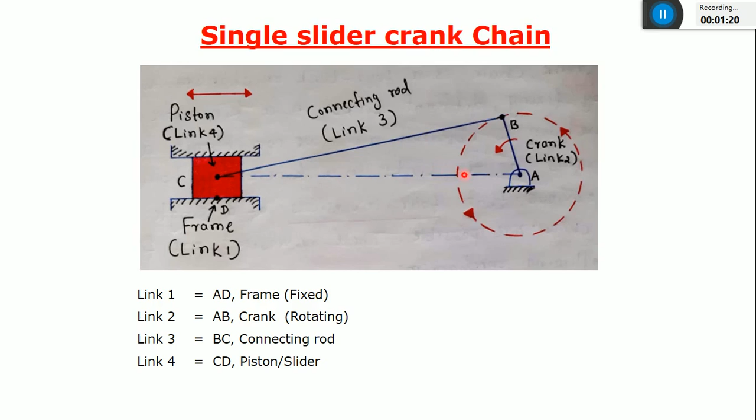After that, we listed 7 inversions, 7 modifications of this single slider crank chain. Out of these 7, the third and the fourth are the most important from the exam point of view: the crank and slotted lever mechanism, and the Whitworth quick return motion mechanism. In the crank and slotted lever mechanism, the connecting rod will be fixed, and in the Whitworth quick return motion mechanism, the crank will be fixed. Here connecting rod is fixed, here the crank is fixed, that is the modification in the single slider crank chain.

Both are examples of quick return motion mechanisms, which are used in a shaper machine, or shaping machine. Just wait for a second.

So this is the shaper machine, and you can see this mechanism is known as the crank and slotted lever mechanism, which was discussed in the previous class, and we have seen the animation also. This crank and slotted lever mechanism has 6 links, 4 basic links, and the remaining 2 are used to connect with the shaper machine. This was the animation. You can see it is having one circular path, circular motion, and one is oscillating type.

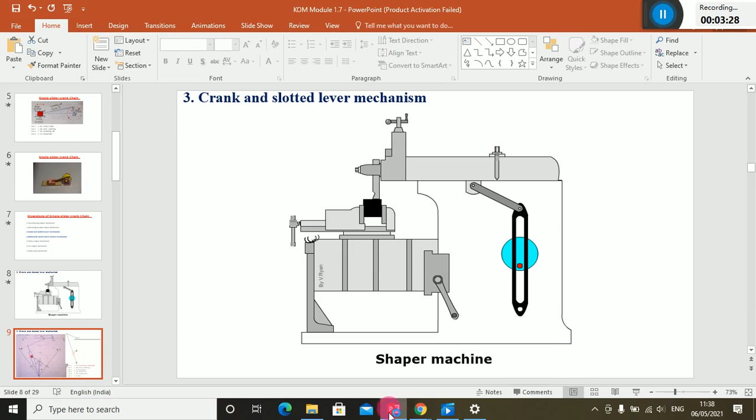So this was the example of a quick return motion mechanism, because during the forward motion it will move with very slow velocity, since it has to remove material from the workpiece. During the backward motion, or the return stroke, it will come back very fast. Hence it is also called a quick return motion mechanism. We discussed the different links, 1, 2, 3, 4, 5, 6, and you can see the connecting rod is fixed in this crank and slotted lever mechanism. So this is the connecting rod.

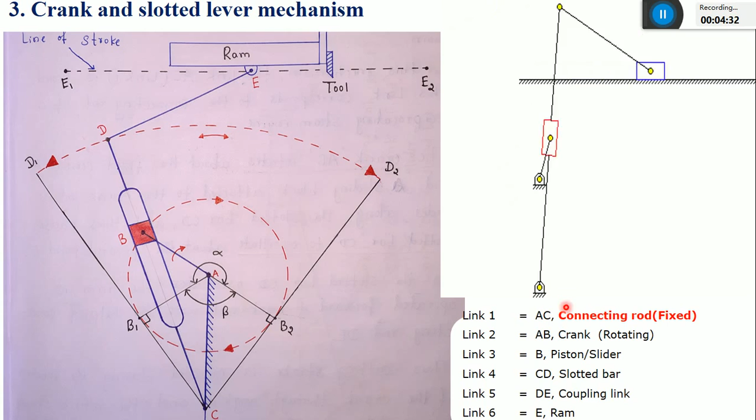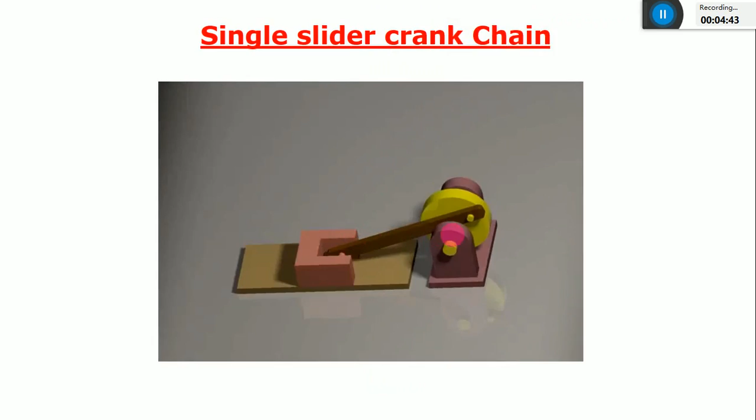As you give input to this crank, the crank starts rotating, hence the slider also starts rotating, as well as reciprocating in the slotted bar, so that you get oscillatory motion of this slotted bar. The longest link of all 6, that is the slotted bar, is oscillating from left to right and right to left, so you get the output motion as forward and reverse, which is the application of a shaper machine. You can see it is forward and reverse, that's the ultimate output we need from this mechanism.

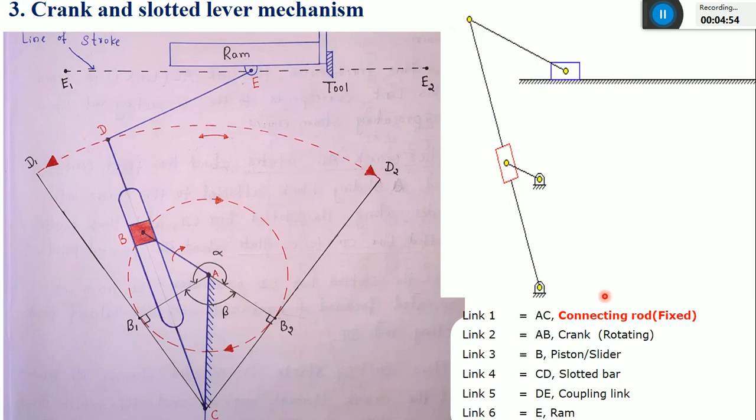So this was the animation of this crank and slotted lever mechanism. After that, we also discussed the second quick return motion mechanism, that is Whitworth. The working principle is again the same. This mechanism is again connected to the shaper machine, which is nothing but a ram and cutting tool, because I want a forward stroke, called the cutting stroke, and the reverse stroke, called the return stroke.

Only the change is that in this case, instead of the connecting rod, the crank will be fixed. Instead of connecting rod, the crank will be fixed — that is the keyword of this mechanism. You'll get two rotary paths, one with respect to point D, that is the slotted bar, and one more is the slider.

During the forward stroke, the angle made by this slider, from B1 to B2, will be alpha, and during the return stroke, the angle will be beta. Since angle alpha is greater than beta, it means during the forward stroke it is taking more time — moving very slowly during the cutting stroke — and beta is less, so the time is also less, meaning it returns back to its original position very quickly within less time.

So this was the application of the crank and slotted lever mechanism as well as the Whitworth quick return motion mechanism. This was the animation — you can see the slotted bar is also rotating, the slider is also rotating.

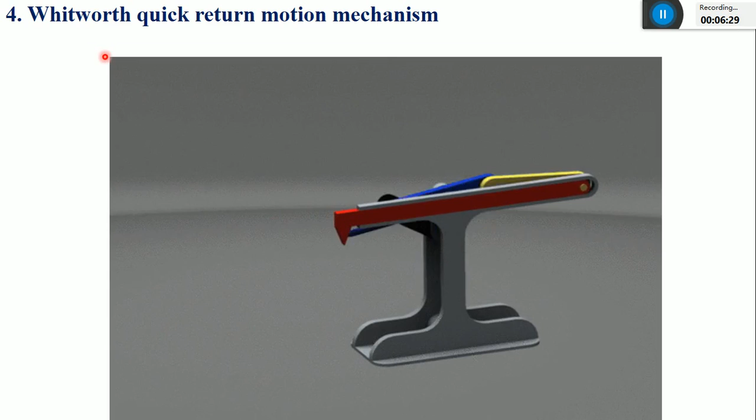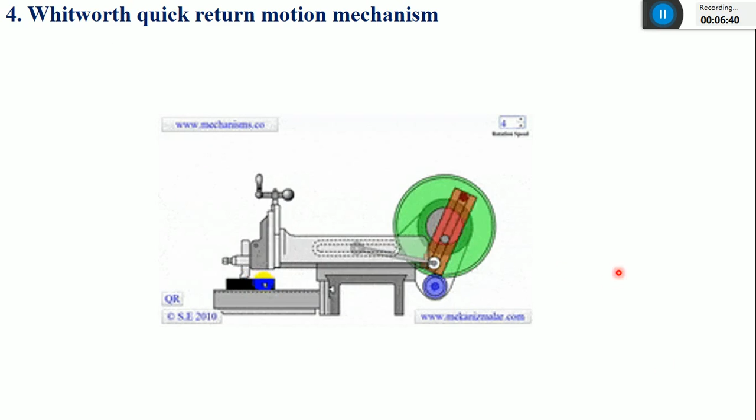So this was also an animation of a Whitworth quick return motion mechanism. You can see the application of this mechanism for the shaper machine. So these two mechanisms were discussed in the previous class. Correct.

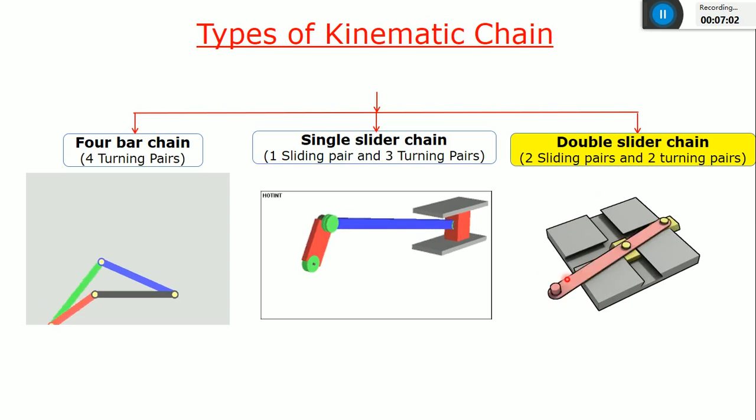In today's class, let me start with the last one, that is a double slider chain. This double slider is having two sliding pairs of both the pistons or both the sliders, and two turning pairs. It is also having four kinematic links, and this double slider chain has three modifications, called inversions, or types of double slider crank chain. First is elliptical trammel, second is Scotch yoke mechanism, then third is Oldham's coupling. We have discussed elliptical trammel in the previous class.

This elliptical trammel is also having four links. Link one is nothing but a slider, can consider any one. This slider is one link, this also one more link, and the link that connects both the sliders is one more link, that is AB, and I'll extend this AB up to point P. This plus mark you can see is a frame, this is a fixed frame.

Similar to a railway track, it is having a vertical groove and a horizontal groove. In those grooves, the sliders are going to slide. In the vertical groove, the slider A will slide up and down, and in the horizontal groove, the slider B will slide from left to right. So finally, when you fix any pencil or point at this point P, it will trace an ellipse.

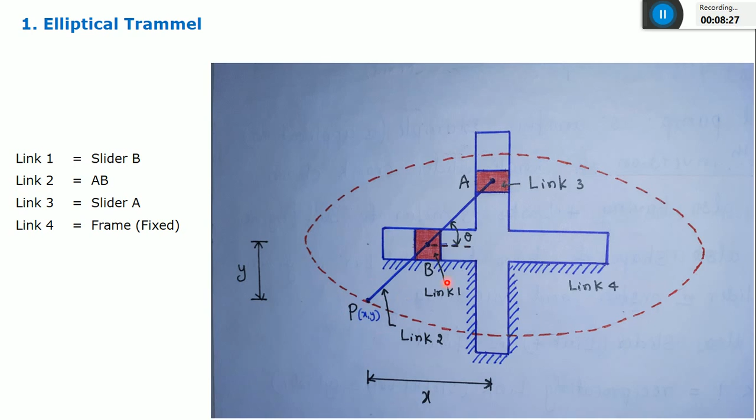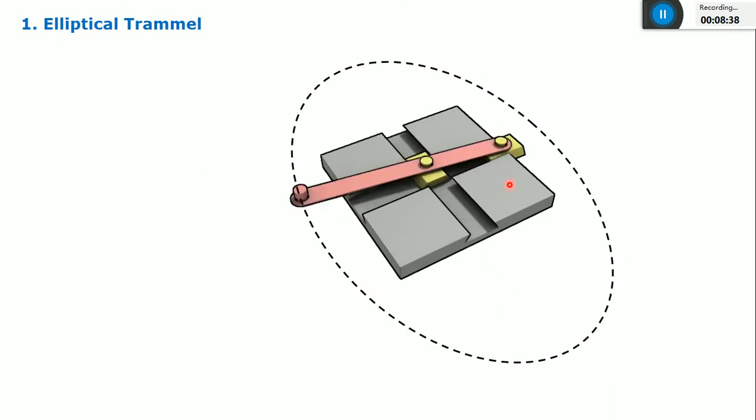The coordinates of this point P are X and Y. So the center, you can take as the origin, and this is X and this is Y. This was the animation. Now also we have proved by using the equation, some derivation, that the path traced by this point P is an ellipse.

Just wait for a second. Just wait for a second. Yeah,

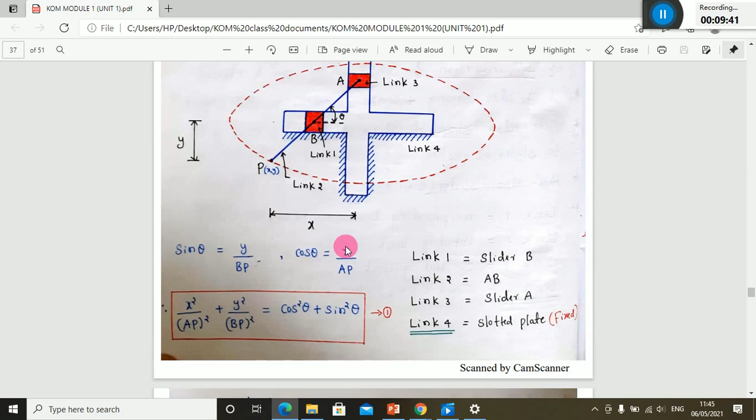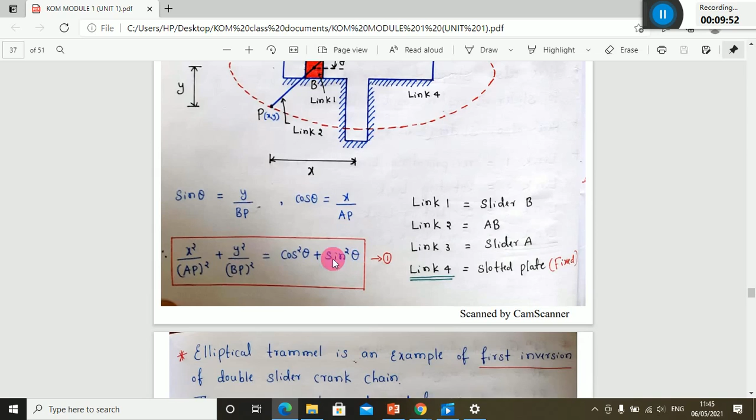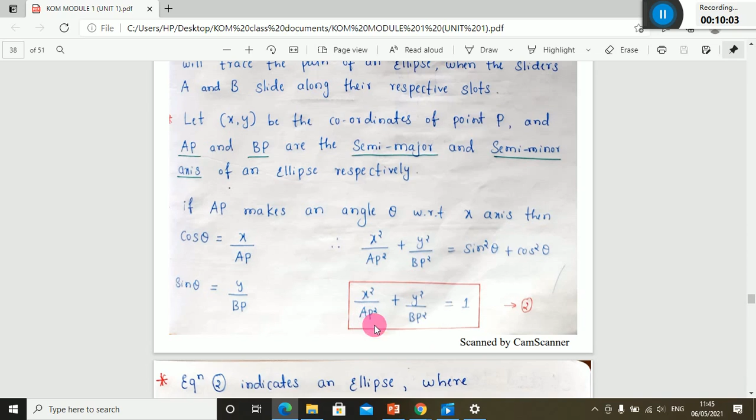This one. When you consider this AP as a reference, and when you're going to consider this triangle, when you apply cos theta, you'll get X by AP, and when you consider this small triangle with respect to link BP, you'll get sin theta, that is Y by BP. So after substituting and simplification, the equation you get is nothing but an ellipse: X square by AP square plus Y square by BP square is equal to 1, where AP is a semi-major axis and BP is a semi-minor axis. This was discussed in the previous class.

In today's class, take the heading as the second inversion, that is a Scotch yoke mechanism. Please write down this Scotch yoke mechanism. This is the second inversion of double slider crank chain.

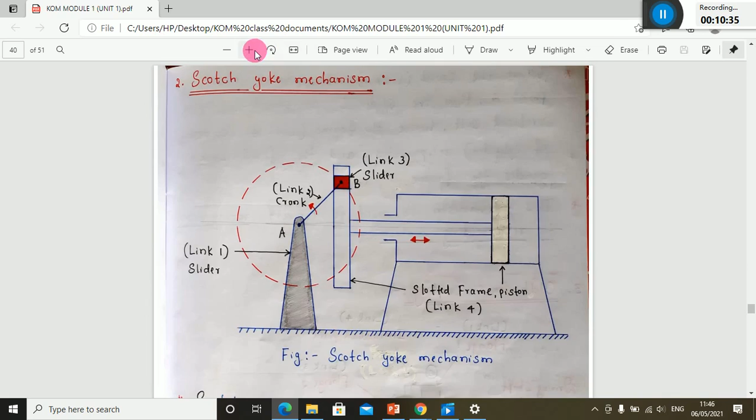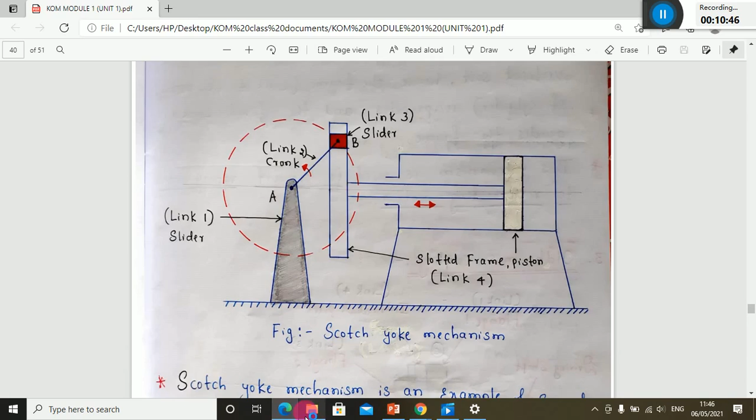Better I'll show the animation first, then only it will be easy to explain this mechanism. So first let me show an animation, the double slider crank mechanism. Before that I'll show the elliptical trammel also, it will be easy to correlate with the first one and the last one. So this is nothing but the elliptical trammel mechanism.

You can see the point P is tracing an ellipse. Whether this video is visible? Anyone please reply. This video is visible or not? Yes, sir. Okay. Yes, sir.

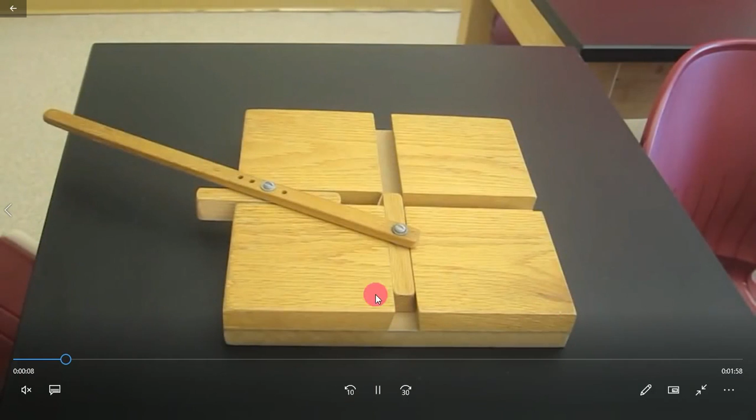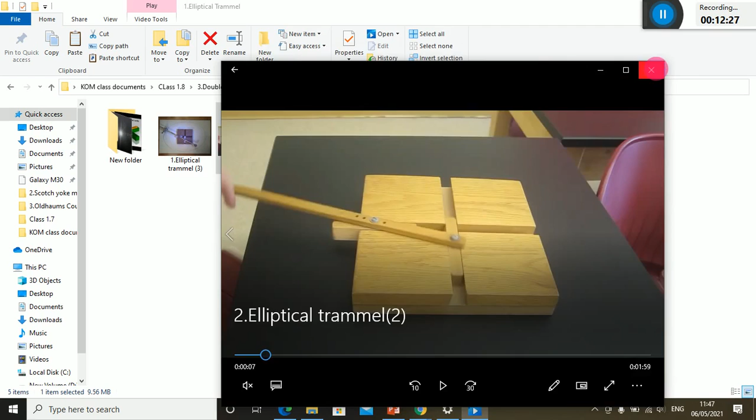And if you want one more video, you can see this also. Yeah, this is also same. So this square block which is having a groove, which is nothing but a frame, that is link 1. And then after this, it's also one image of the elliptical trammel. So this is also same.

And next what we'll do, we'll go to this second mechanism, that is the Scotch yoke mechanism. I'll show the application only.

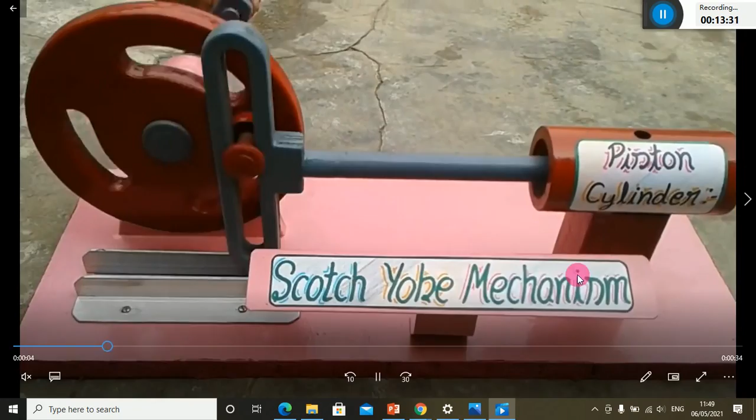Please watch this animation. This is nothing but a Scotch yoke mechanism. You can see the type of input motion is a rotary motion, and whatever output you are getting, it is reciprocating motion. So it is used in a compressor to increase the pressure of air.

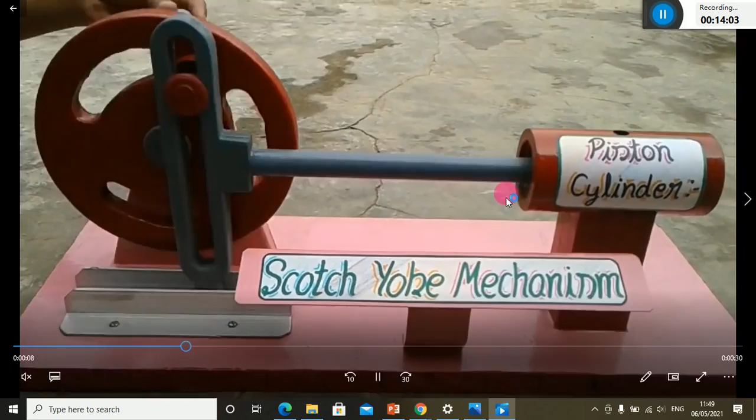The application is compressor. Also you can see the output motion is having a uniform velocity. The output motion is always uniform during a forward stroke as well as return stroke. Since the motion is uniform, you can use it for generating sine functions or other harmonic functions. One more application is to generate sine functions with the help of this Scotch yoke mechanism.

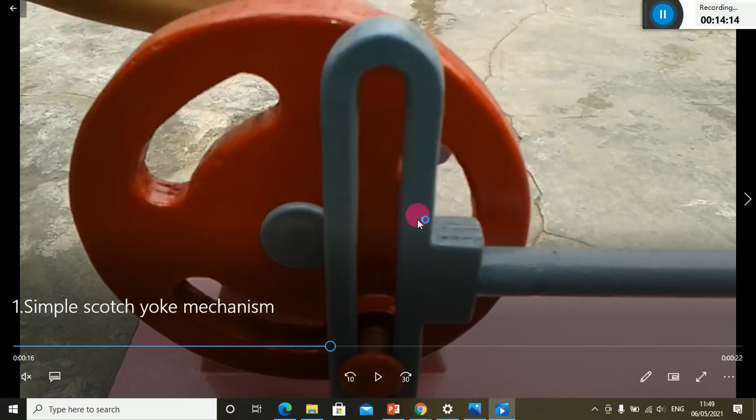You can see the red color disc, which is nothing but a crank, and this red color dot. This is a slider which slides up and down, and this bar which has a slot or groove is known as the slotted bar. The first element is this frame. Second is the crank, third is the slider, and the fourth is this slotted bar. So this is the application of a Scotch yoke mechanism.

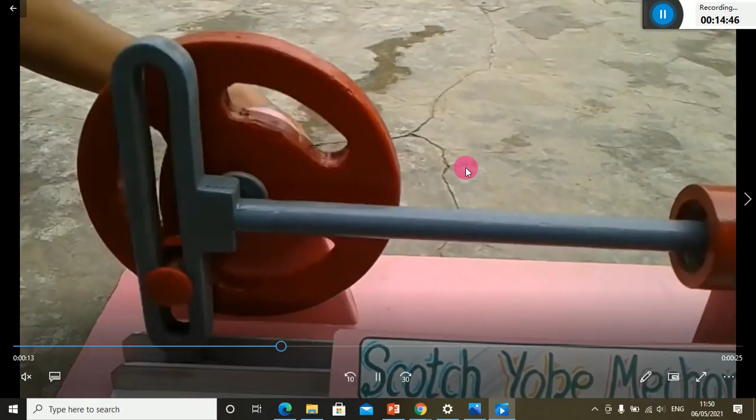And one more thing, there is only one slider, as I said. So just leave out this piston. The piston will not come in the Scotch yoke mechanism.

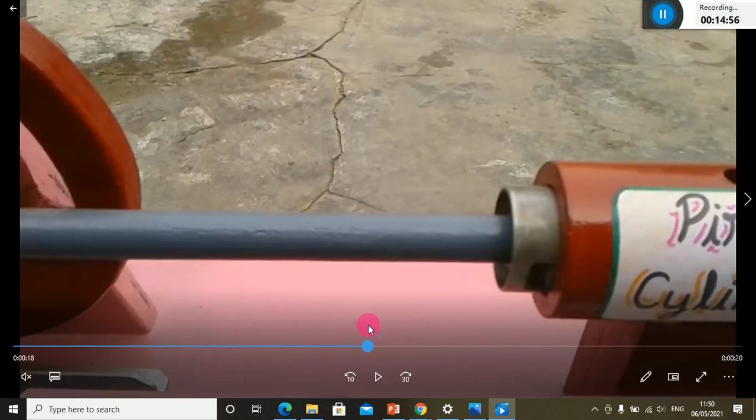You can see at the left part there is only one slider. So this is the modification of a double slider mechanism. Then what about the one more slider? You can see that in this case one slider is fixed, which is not visible here. Better I can show with this video. Remember, in the Scotch yoke mechanism, out of those two sliders, one will be fixed.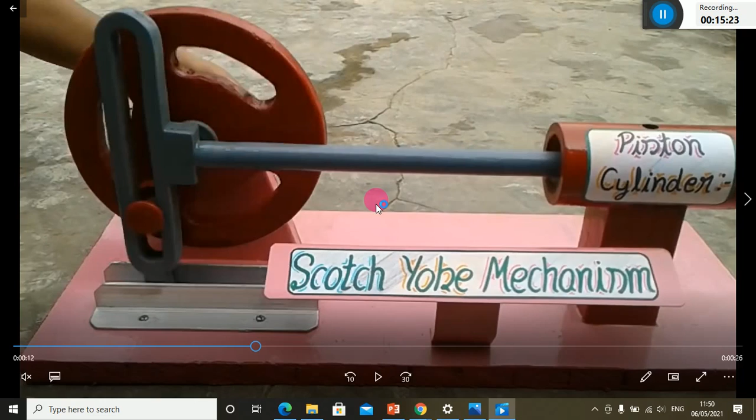Just write down. Okay, just wait for a second. Yeah.

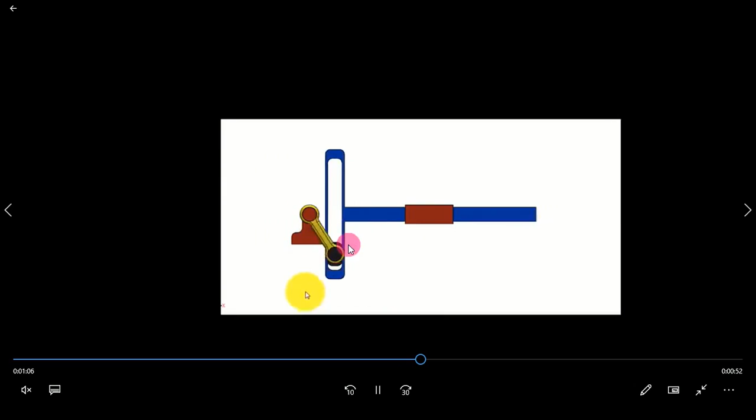This is also an example. You can see the rotary input motion is converted into reciprocating output motion. There is only one slider, that is the black color slider, and this red color is the other slider, which is fixed. When you consider a double slider mechanism, and out of those two sliders one is fixed, it will become a Scotch yoke mechanism.

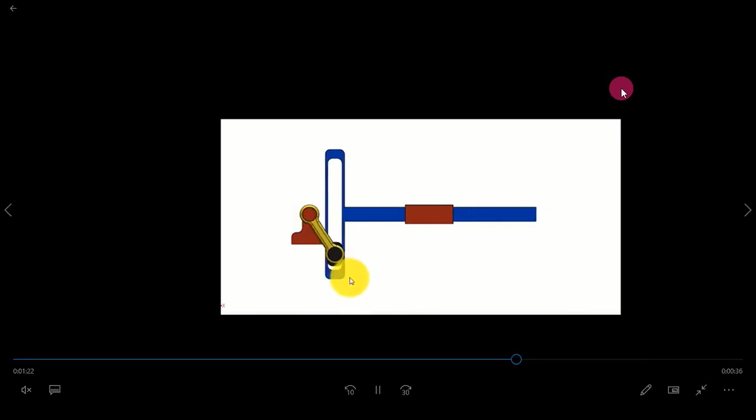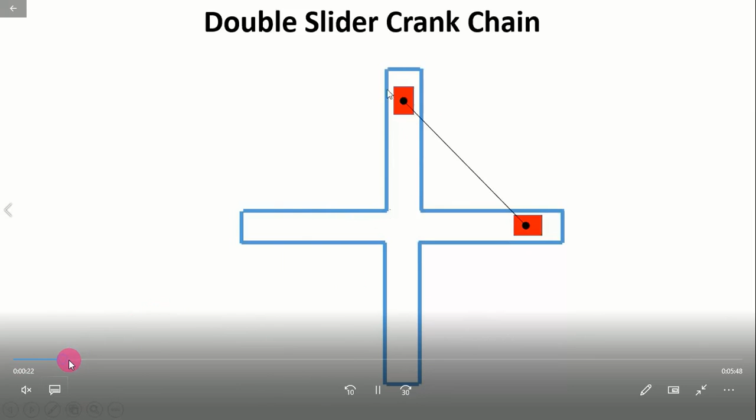So for your convenience, I can show one more. This is the double slider mechanism, correct? And if you fix the frame, then it will become an elliptical trammel. So fixing this frame means it will become an elliptical trammel.

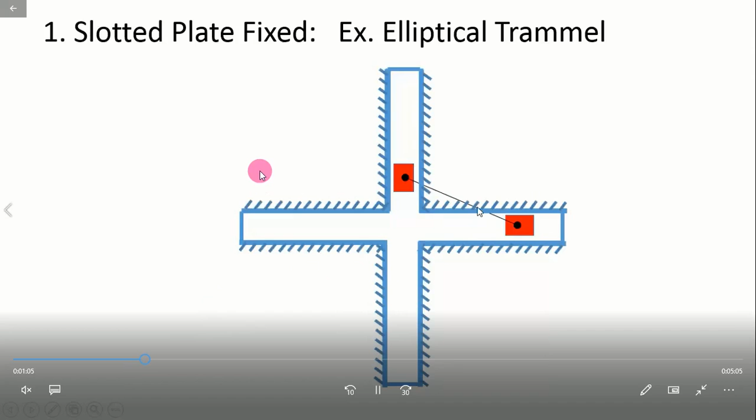Okay, the point traced by this extension of this slider, it is not visible in the video. No sir, visible sir, visible sir. Okay, okay.

So if you fix this slotted bar, it will become an elliptical trammel. And when you extend this connecting link, it will trace an elliptical path. Instead of fixing this slotted bar, if you fix any one slider, for example, you can see.

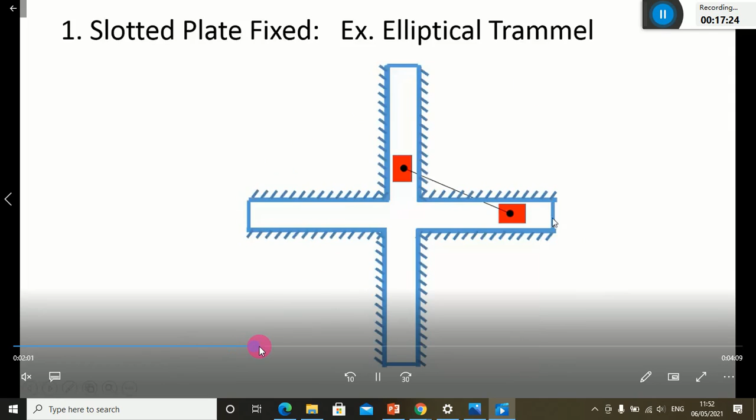Sir, I have a doubt. Yeah, what is the doubt? Hello. Yeah, you can ask the doubt. What is the elliptical mechanism, how to set? Sir, in elliptical mechanism, how to set the timing? I'm not getting your question. In the same double slider mechanism, you're asking the doubt? Your voice is not clear. Yes sir, please ask the question once again.

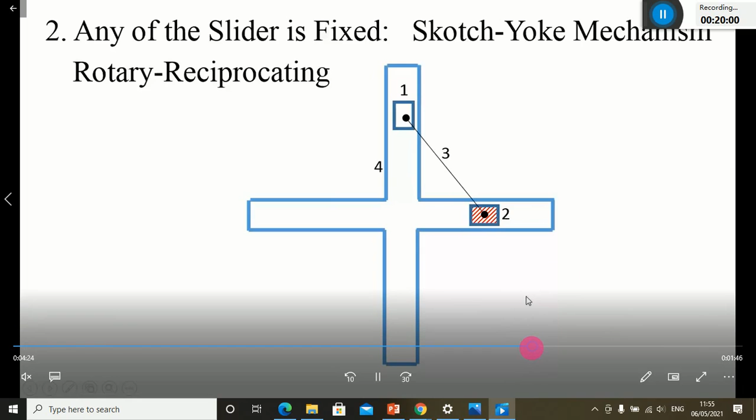Just see the transformation. So this was slider 2, it was fixed. Now the crank is nothing but the link that connects both the sliders. This crank is free to rotate in a circular path. As it starts rotating in a clockwise direction, it will pull the slider, so the slider will move up and down. As the slider moves up and down, this slotted bar also starts reciprocating from left to right and right to left. So that is the modification.

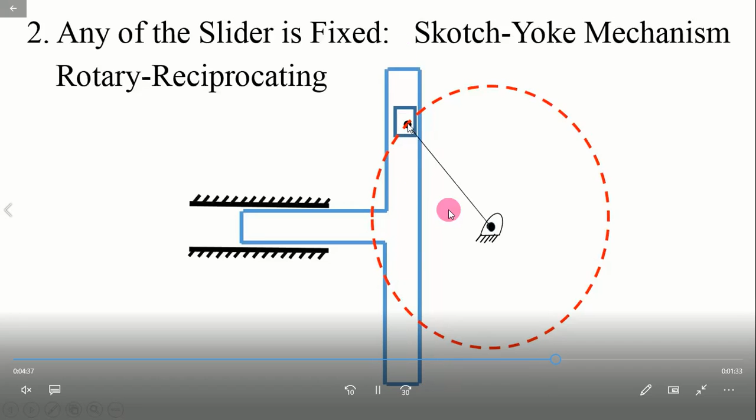You can see, once again, instead of fixing the slotted bar, if you are fixing a slider, one slider is fixed, and only the other one will be reciprocating. So the input is rotary and the output is reciprocating. That is the one I want to clarify.

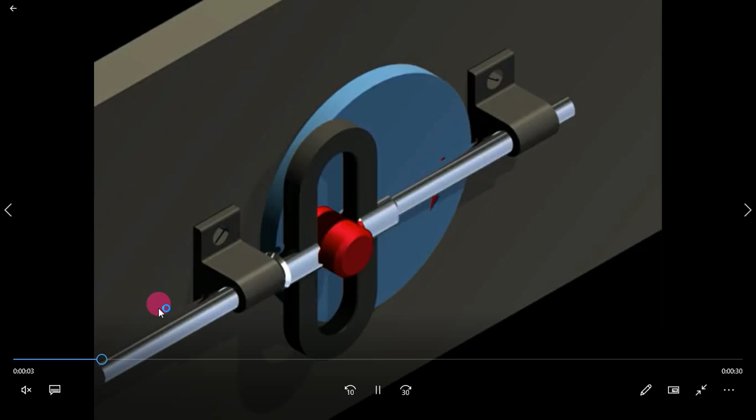One more, if you want for better understanding, you can see one more example. This red color dot is nothing but one slider, and the black color one is nothing but a slotted bar, including this silver color part. It means the input motion is circular and the output is reciprocating.

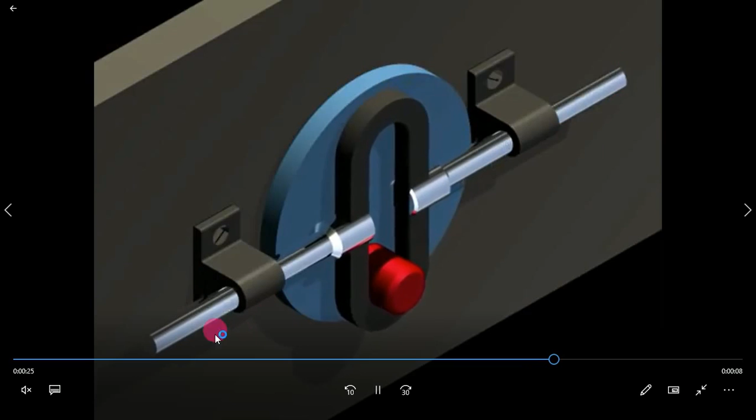And if you want the animation, you can see this animation. Just wait for a second.

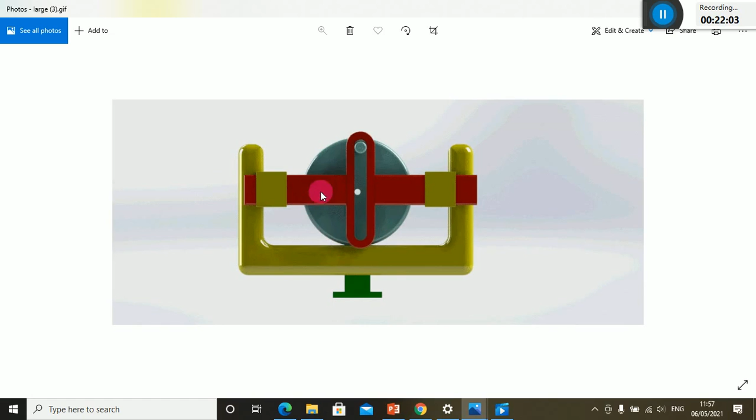This is also an example of a Scotch yoke mechanism. You can see there is only one slider, this dot color. Slider means it has to rotate with respect to the groove, it has to slide as well as it has to rotate. It means the other slider is fixed. That is the point I wanted to clear.

Then I'll go to the PPT again, and explain once again the construction. You can see this part, link 1. As I said, link 1 is nothing but the slider, it is fixed, you can write down. And this AB is a crank, which is nothing but the link that connects both the sliders. As I explained in the previous slide, the link that connects slider A and slider B is that connecting link, but in this case it is rotating in an anti-clockwise direction, so I can call this link AB a crank instead of a connecting link. And this is link 3, that is slider B. And the last one has to be...

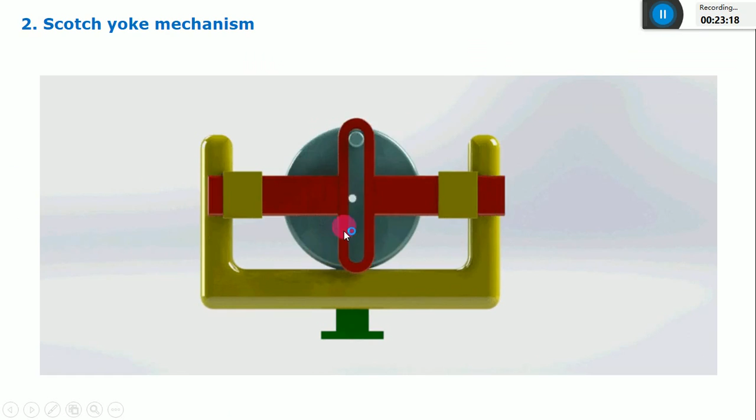Screen is not visible, sir. What about others? Sir, not visible, okay please wait. I think there is an interruption in the internet, please wait for a second. Now I think the screen is visible. There was an interruption in the internet, so you can see now.

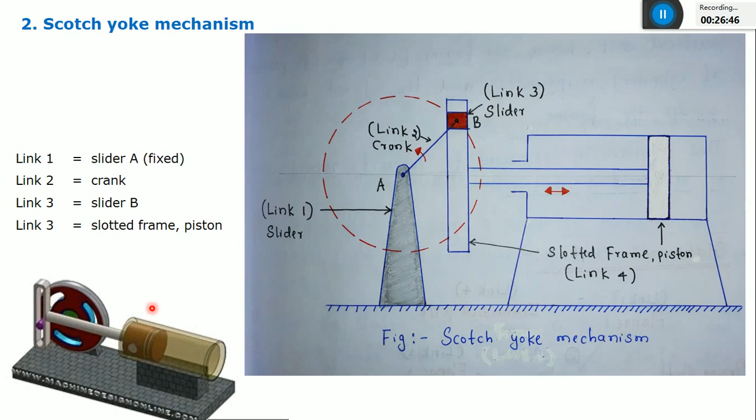This is also one more animation. There is only one slider, the second slider is fixed.

Let's take the next one, that is Oldham's coupling. Let's take a rough diagram. This is link 4.

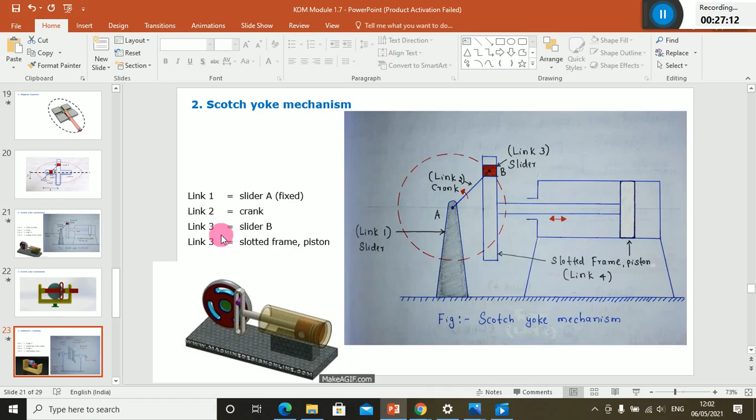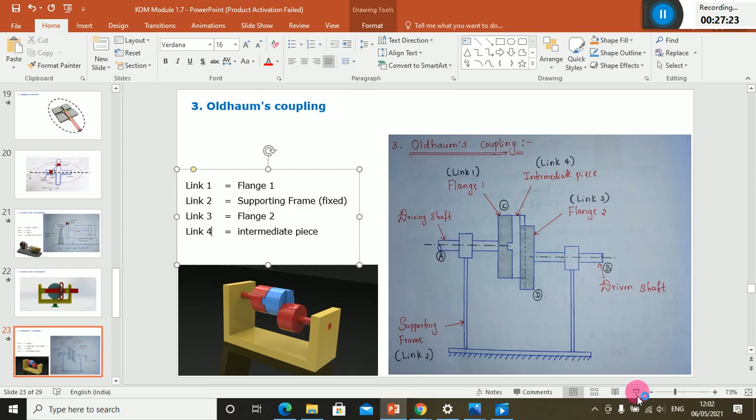Let's take the third inversion of double slider crank chain. Let's take a rough diagram of this one. I will try to explain what exactly this is.

It means there are two shafts. This is one shaft, the red color one at the left side, and this is also one more shaft. You can see the shafts are not collinear. They are parallel to each other and non-linear. The axis of both the shafts is not the same. They are parallel to each other, and if you want to connect both the shafts, that becomes the Oldham's coupling.

In this figure also you can see, this is a driving shaft, you can call it link A, and this is a driven shaft, this is link B. If you want to connect both the parallel shafts, they're non-linear and they're parallel to each other.

If you want to connect those parallel shafts, you have to use this coupling that is known as Oldham's coupling. I think you have studied in the previous semester or this semester, in drawing or computer drawing, types of different couplings. So it is known as Oldham's coupling. The purpose of using this Oldham's coupling is to connect two parallel shafts.

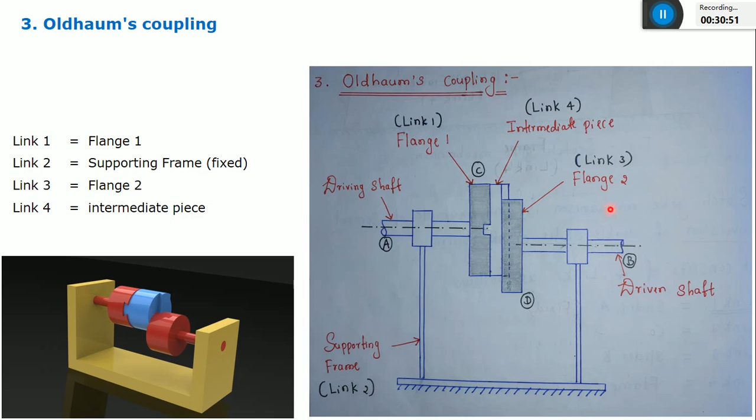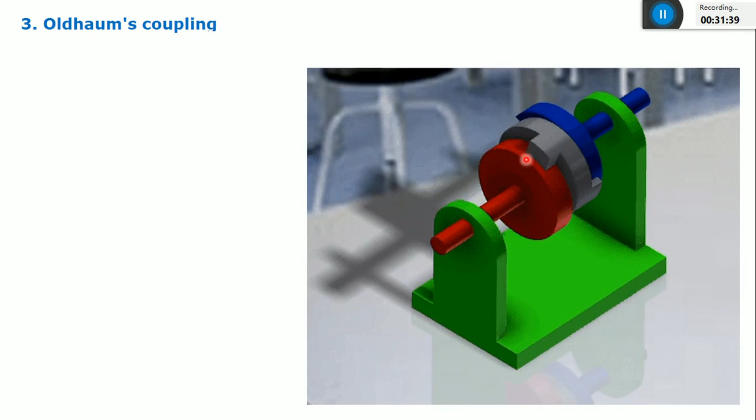You need to couple both the flanges with the help of a gray color disc, known as the intermediate piece. So in this way you need to couple both the parallel shafts, which have a small distance between them, so that you can transfer the rotary motion from the turbine to the generator. This is the example of Oldham's coupling, and if you want the animated video, I can show that also.

I'll take another 10 minutes, please bear with me. So the third one is nothing but this Oldham's coupling, correct? So you can see this animation, it will be clear.

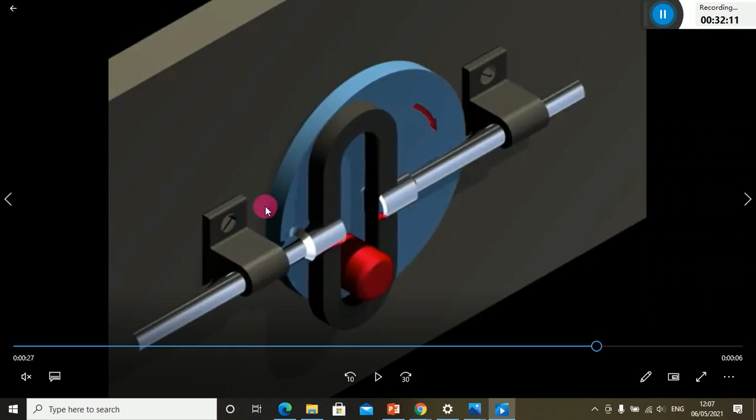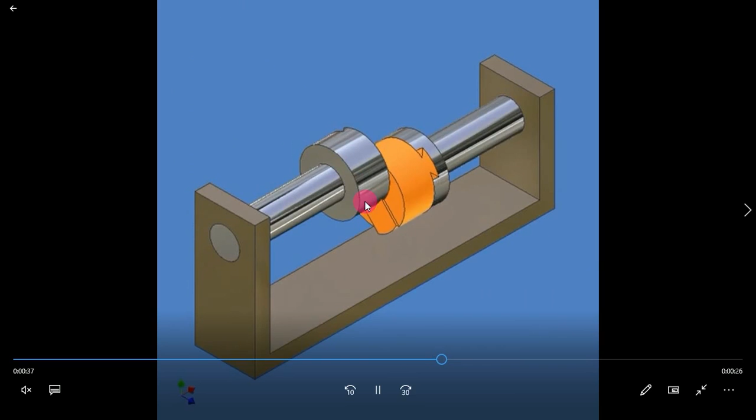I can see from this side the intermediate piece has a groove on both sides. And one more thing I want to explain is... just wait for a second.

Okay, I'll take another 10 minutes to complete this Oldham's coupling.

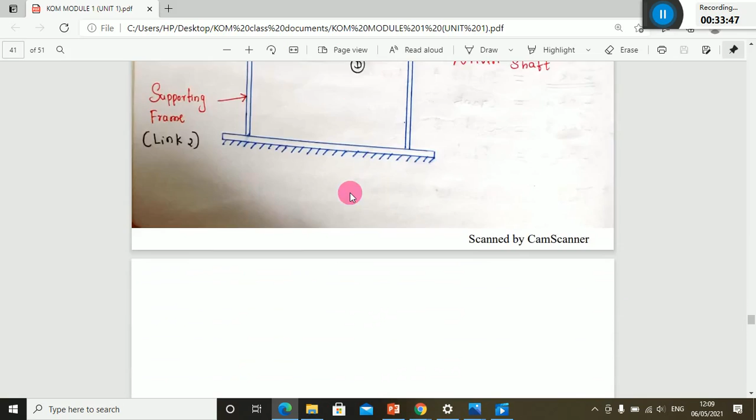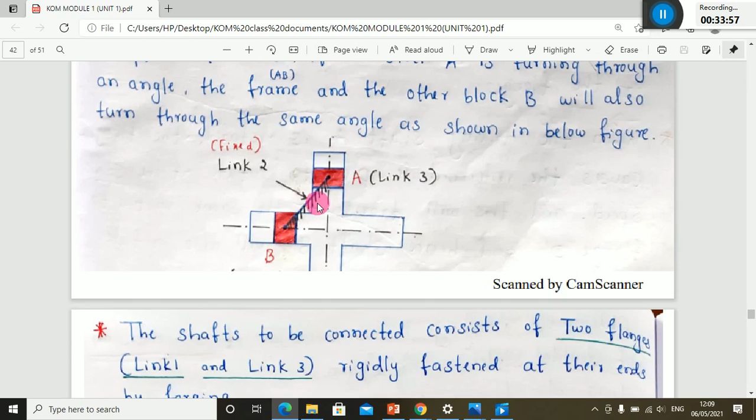You can see this is the double slider crank mechanism, with slider 1 and slider 2. If you fix the link that connects both sliders, it will become the application of Oldham's coupling. So the modification of this double slider crank mechanism, such that the link connecting both sliders is fixed, will become Oldham's coupling.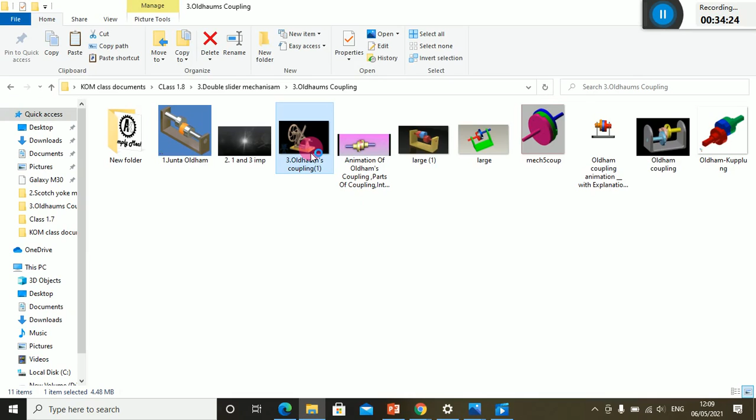For that, I can show this video of how it is fixed.

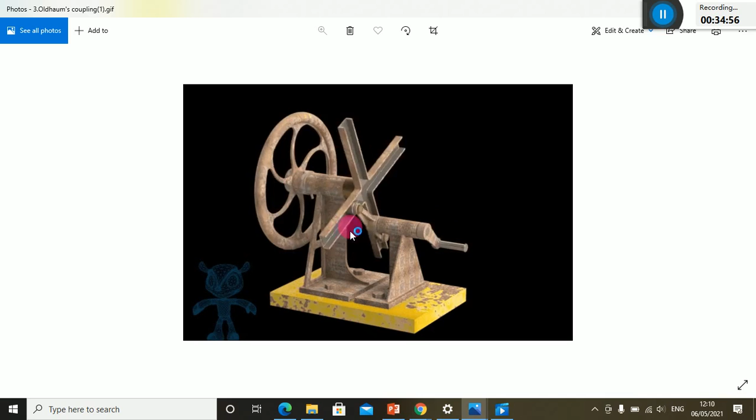You can see this is one slider, this is one more slider. The link that connects both sliders is fixed, meaning there is no relative motion between that link and the sliders. Slider A, slider B, and the connecting link will form a single link. Even though overall it is rotating, there is no relative motion between the connecting link and the two sliders, as explained here. So all these three will be considered as one link.

You can see this connecting link is rotating, and this plus-color slotted frame is also rotating. This is the driving shaft and this is the driven shaft. Hence this is the modification of a double slider crank mechanism, such that the link connecting both sliders is fixed, and you get this kind of mechanism.

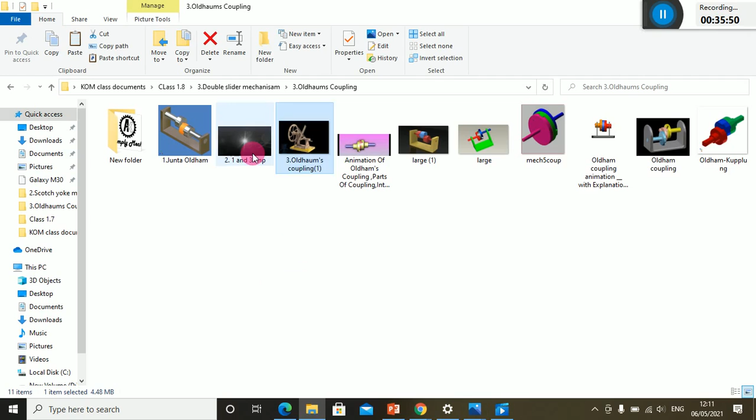If you want one more, the last video I can show to clarify Oldham's coupling. As I said, this is the elliptical trammel. If you fix the slotted bar, this plus-color mark, it will become an elliptical trammel.

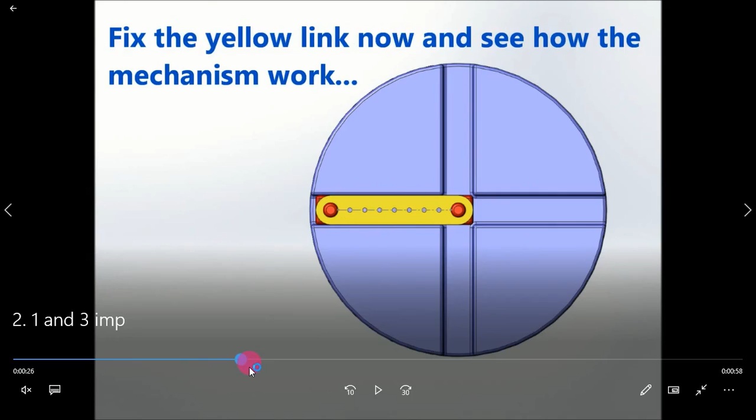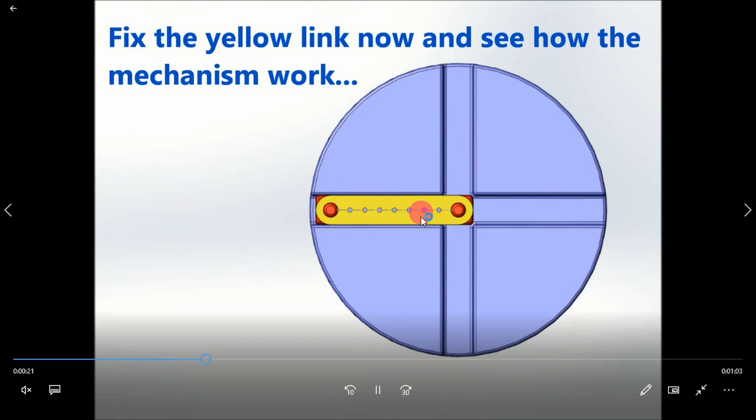And if you want to fix the link that connects both sliders - this is slider A, slider B, and this yellow color is the connecting link between slider A and slider B - just watch the kind of motion. You can see the entire slotted bar is going to rotate, while the connecting link is not rotating, it is fixed.

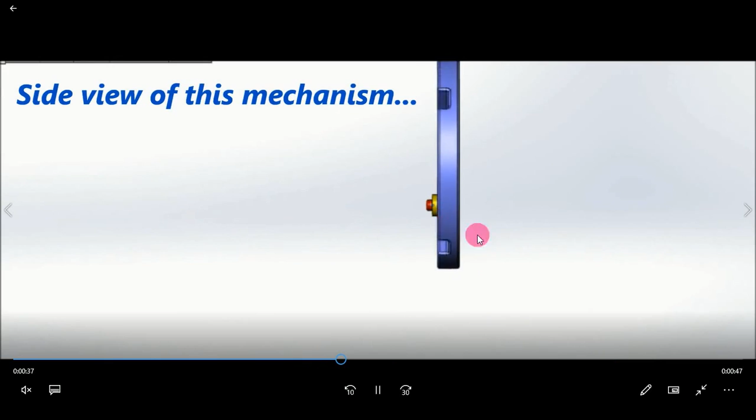This is the side view, showing the modification of a double slider crank mechanism. You can see this is slider A and this is slider B, and these are the couplings. Again, I'll do the modification in such a way...

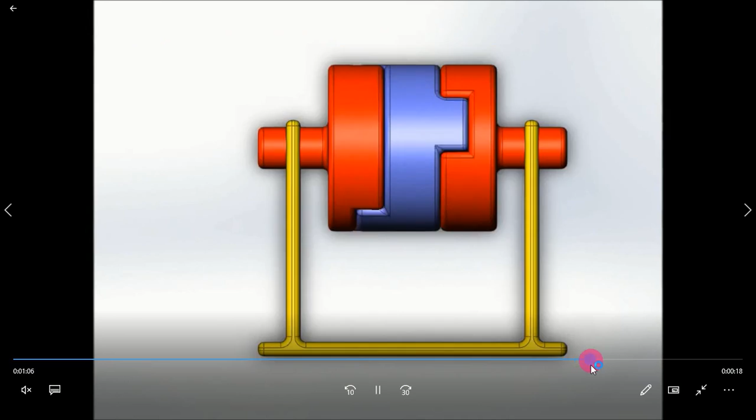This is also one shaft, one more shaft. So now, finally, after modification, this will be the final result. This will be slider A, slider B, and you are modifying the slider as a shaft. You are connecting two shafts, driving shaft and driven shaft, with this intermediate piece. Don't worry too much about this part - the only thing I wanted to clarify is that to get this Oldham's coupling, the link connecting both sliders is fixed.

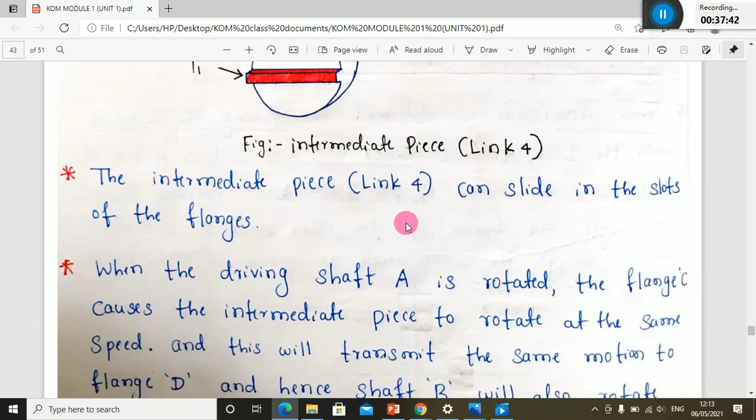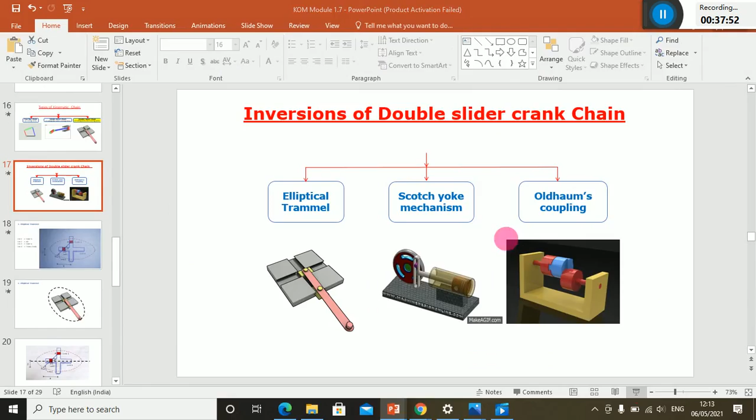So in today's class, we have discussed three inversions of this double slider crank chain. The first inversion is the elliptical trammel where the slotted frame is fixed. Any doubt?

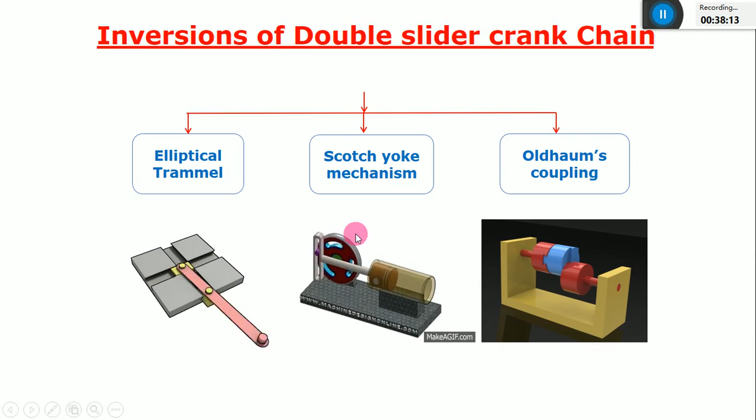Sir, this elliptical trammel, mainly where is it used, sir? Once again, pardon me, your voice is not audible. Once again. Sir, this elliptical trammel, mainly where is it used, sir?

This was used in the olden days. If you want to cut an ellipse in the sheet metal industry, to get a metallic sheet in the form of an ellipse - in the olden days there were no CNC machines, correct? In that case, to cut an elliptical sheet metal, you can fix the cutting tool at the end of point P, and you can get the elliptical machining. Now with CNC machines, you can do G-coding and M-coding, and move the cutting tool as per your requirement. But in the olden days, to get elliptical machining, we used to use this elliptical trammel, and that is the application.

I hope this is clear.

This was the second inversion, where one of the sliders will be fixed, and this is the third inversion. In this case, the link that connects both sliders - you can see the pink color - that will be fixed, so that you get the Oldham's coupling.

Oldham's coupling is used to connect two parallel shafts. For example, if you want to connect a turbine shaft with a generator shaft, which are parallel to each other, you can place flange 1 and flange 2 with one more intermediate piece.